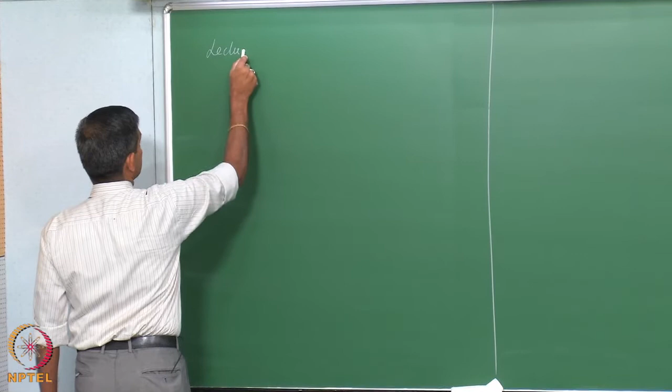Friends, let us talk about the QRA application problems in lecture 13, where we are going to talk about some application issues in quantitative risk assessments in module 3, where we are focusing on accident modeling, risk assessment and management.

We already said in the last lectures how one can handle different kinds of release scenarios like fire and explosion models. We have also said what will be the consequences in case of fire or explosion in terms of detonation, deflagration, etc. We have also said how overpressure and negative pressure can create damage on an existing system because of explosion. We also said how one can find equivalency of explosion damages using TNT equivalence. We are given equations to estimate them, and we also said what would be the over exposure risk limit in a given system for fire and explosion accident models.

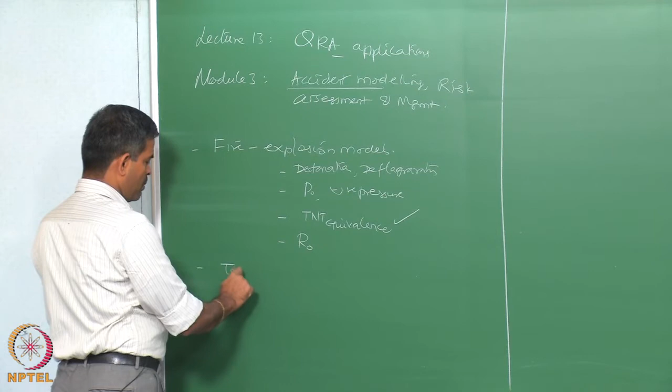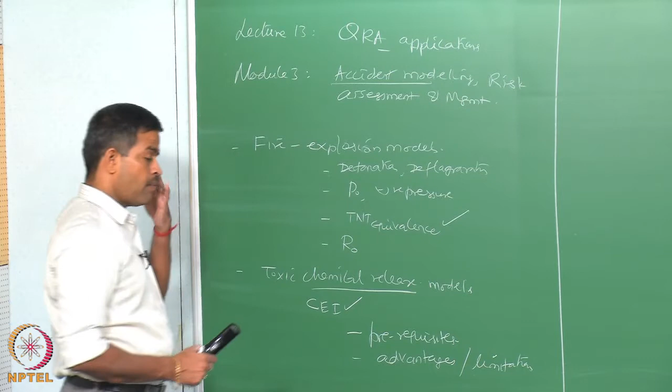Subsequently, we also discussed toxic chemical release models, where we said that chemical exposure index will be one interesting domain by which we can easily estimate the consequences indirectly. It has got certain prerequisites to do chemical exposure index. It also has certain advantages, and of course it has got certainly a few limitations, but globally the Dow CEI is acceptable as one of the powerful tools for estimating the damages which are envisaged because of probable or possible chemical releases in a given process system.

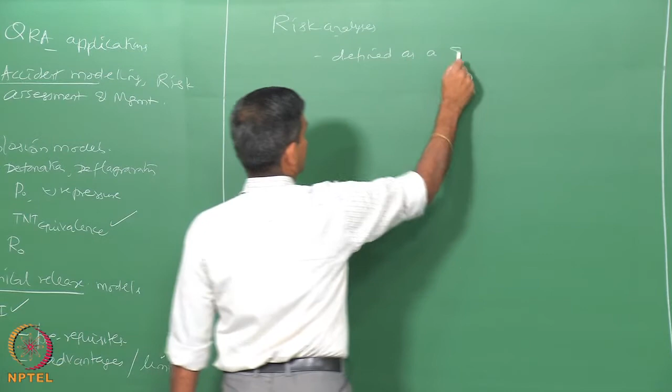Having said this, interestingly, there are many application issues when you talk about quantitative risk assessment. We already said risk analysis can be defined as a systematic identification. Let us get back to the original definition of risk analysis. It is defined as a systematic identification and description of risk.

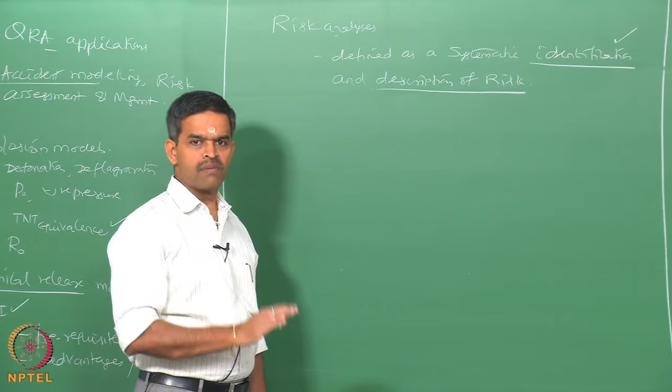It is very interesting. You have got to identify the presence of risk, you have got to describe what would be the risk. For example, identifying does not mean it will become a risk actually. You have got to describe the risk in terms of personnel, property, environment. So it is a very broad term of risk analysis. In property, one can also include equipments, one can say asset.

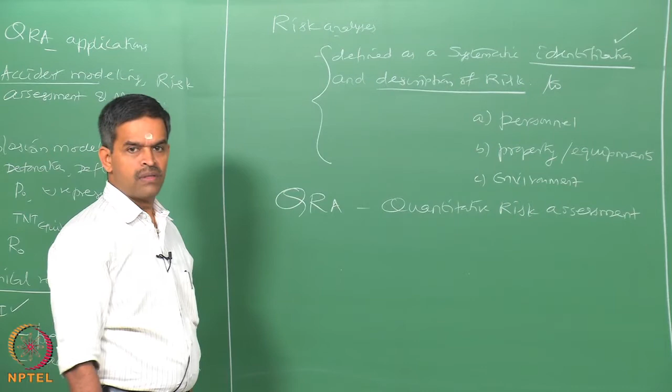Therefore, QRA, which is quantified risk assessment, quantitative risk assessment, therefore, need to be focused on the identification of applicable hazards, description of hazards, of personnel, environment and equipment.

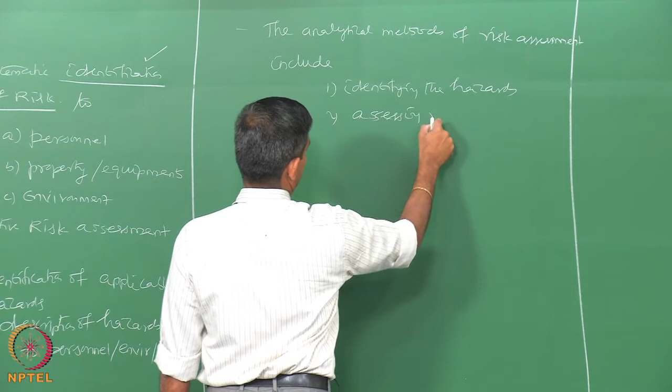Therefore, the analytical tools, analytical methods of risk assessment include identifying the presence of hazards and then assessing risk from the identified hazards.

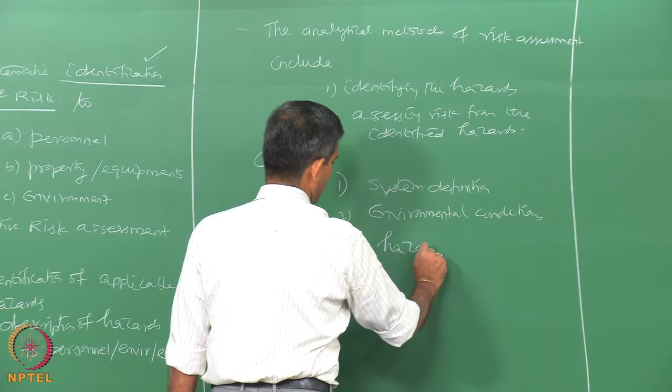So, if you look at the flow chart of risk assessment, the first step obviously should be the system definition, then identifying the environmental conditions, then identifying the possible hazards, then from the possible hazards realization of them in terms of assessing risk.

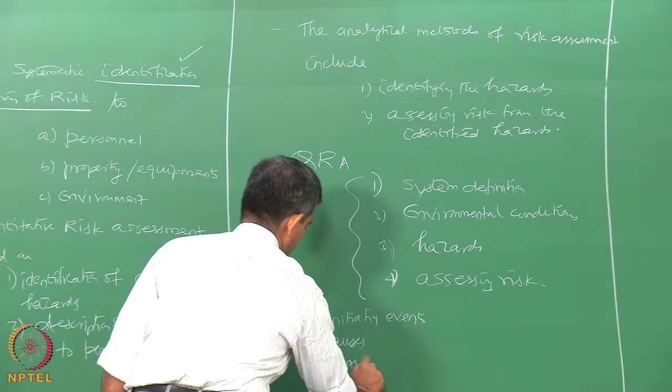While doing so, one need to identify the initiation or initiating events, causes and consequences. So these are important parameters, let us say gauge marks, in QRA.

As we now agree, in risk assessment the foremost step is to identify the hazard after you describe the system. After you describe the system, you identify the hazard first. So what we call as hazard identification, which we already seen in earlier lectures. Let us quickly revisit this again and understand. Okay? Hazard.

HAZID is useful in identifying the initiating events, it is done through a broad review of possible hazards present in the system, and also identifying the sources of accidents.

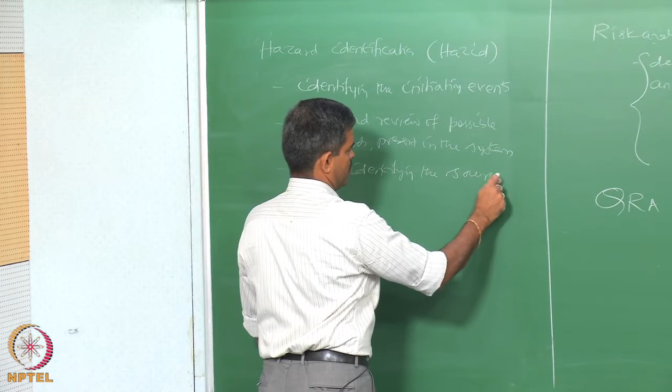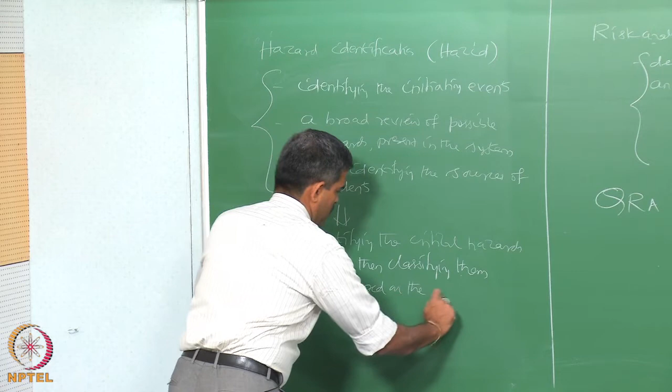So, most of the job of QRA is done at HAZID stage itself. Then in that case it will lead to identifying the critical hazards and then classifying them, based on the severity of consequences.

What is the advantage of classifying them? Once you classify them, you will know what should be the decision on level of analysis.

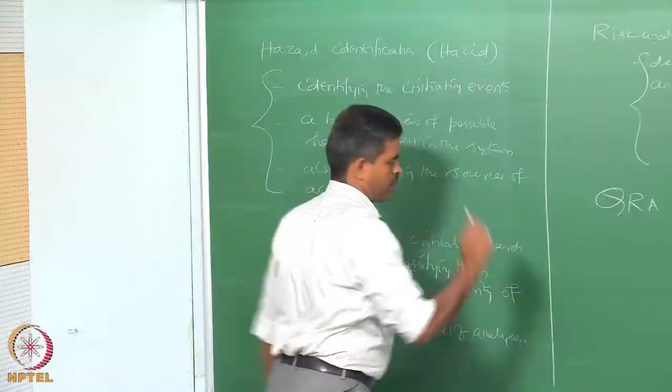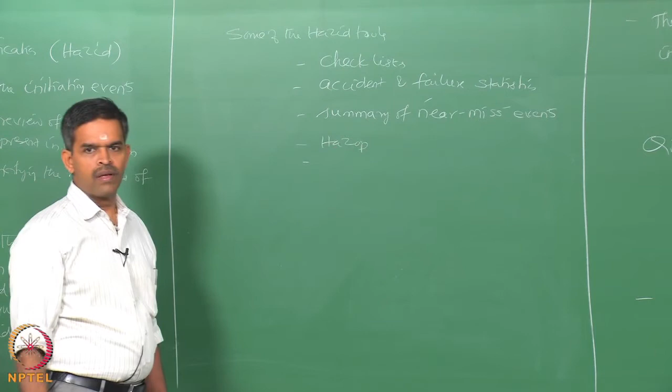Some of the hazard identification tools can be listed. Some of the HAZID tools could be checklist, accident and failure statistics, summary of near miss events, HAZOP, comparison of studies in terms of severity of consequences.

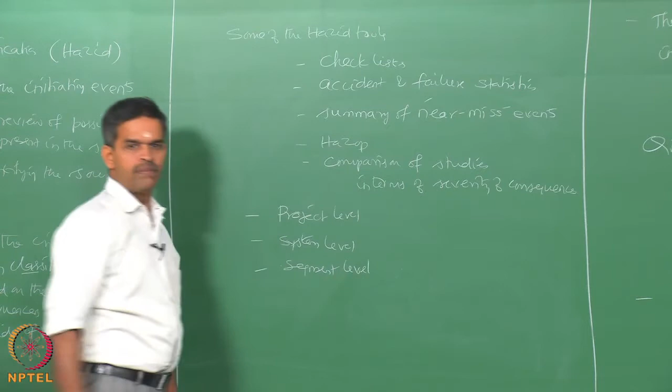Which can be then applied to project level, system level, segment level, equipment level. If you recollect, interestingly FMEA could be a useful tool in equipment level. If you recollect, interestingly HAZOP could be a useful tool. If you recollect, interestingly HAZID or what-if, etc., could be a useful tool. So, at different levels we keep on doing them, in fact even operation level, all, okay.

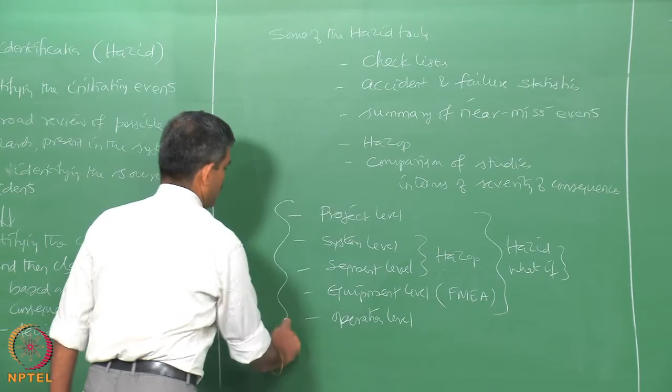As we agree and understand now, hazard identification is more or less leading to the summary of causes and consequences.

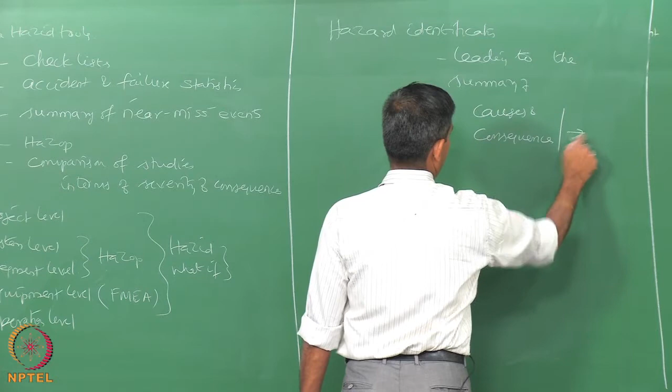To take it forward to QRA, instead of doing hazard analysis, one can also do cause consequence analysis. So let us talk about cause analysis. Cause analysis identifies the causes alone that may lead to initiating events.

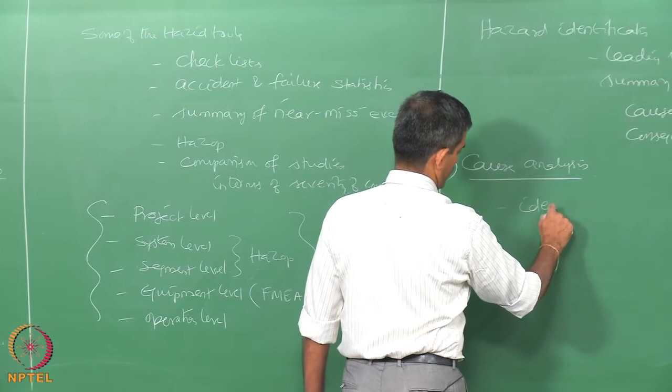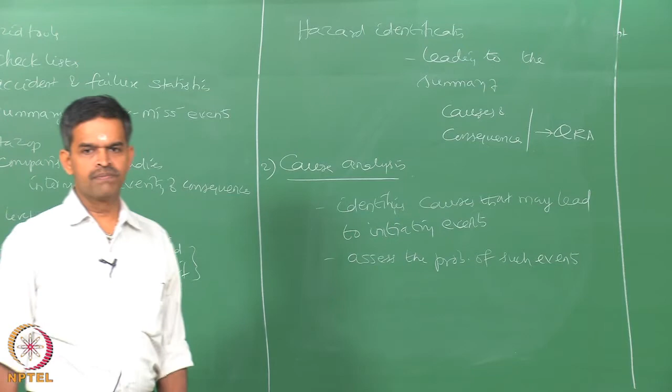It assesses the probability of such events, meaning the initiating events. We all agree that it is important to identify the cause of hazards or initiating events, because they will actually be the starting point of potential accident sequence.

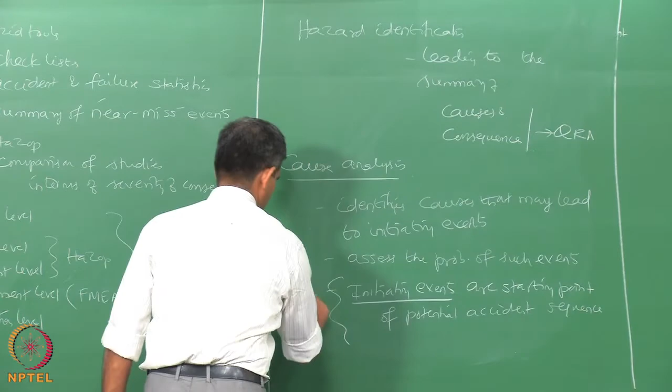So, initiating events are the starting point of potential accident sequence. I mean, it starts from there. It is a very, very important statement. So cause analysis helps us to actually identify these initiating events.

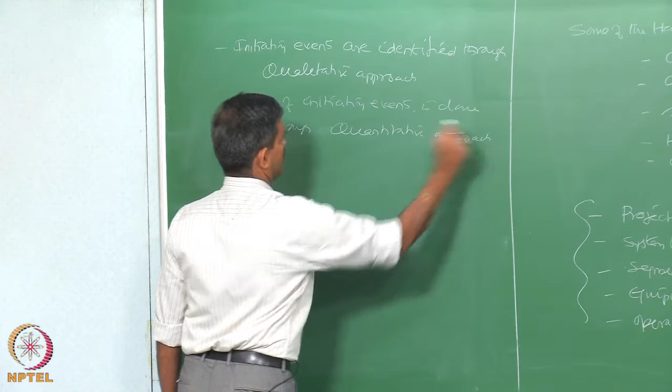Identifying the initiating events is done through a qualitative approach. Initiating events are identified through qualitative approach. If we really wanted to find the probability of initiating events, then this is done through quantitative approach. Identification is through qualitative, probability of occurrence of the initiating event is through quantitative approach.

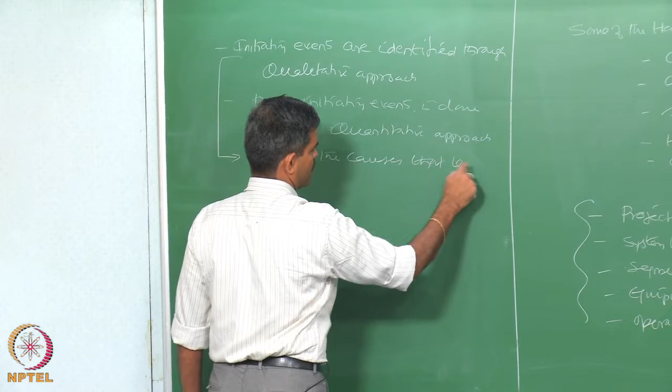The qualitative analysis identifies the causes that lead to initiating events, it also identifies the possible combinations that may result in occurrence of incident.

Some of the qualitative analysis could be examples which we already studied, but still examples could be HAZOP, preliminary hazard analysis, failure mode effect analysis, failure mode effect criticality analysis, human error analysis.

It is very interesting, which will try to tell us what could be the probable oversight which essentially come from near miss events or reporting of near miss events. You will be able to get human error analysis. One can also look at task analysis, one also look at error mode analysis.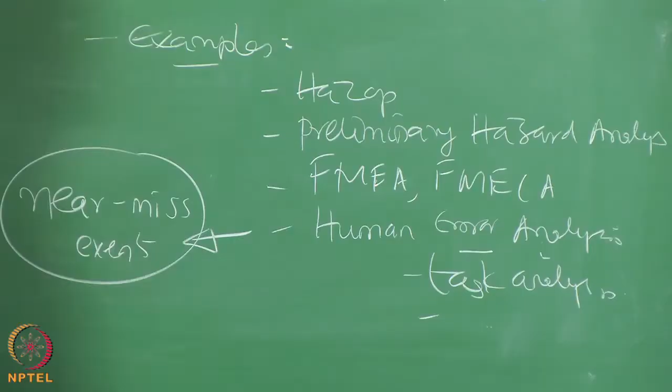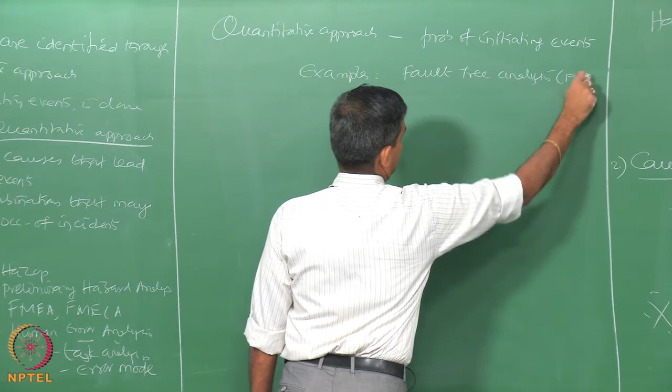If you look at alternatively the quantitative approach, which will lead to estimating probability of occurrence of initiating events, some of the examples could be fault tree analysis, event tree analysis, synthesis models, Monte Carlo simulation, and one can also use BORA methodology.

Interestingly, all are elaborately explained in Srinivasan Chandrasekaran, 2016, risk and reliability of offshore structures, which is CRC Press.

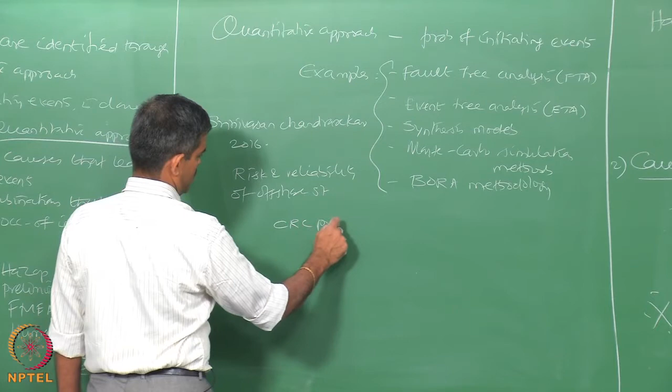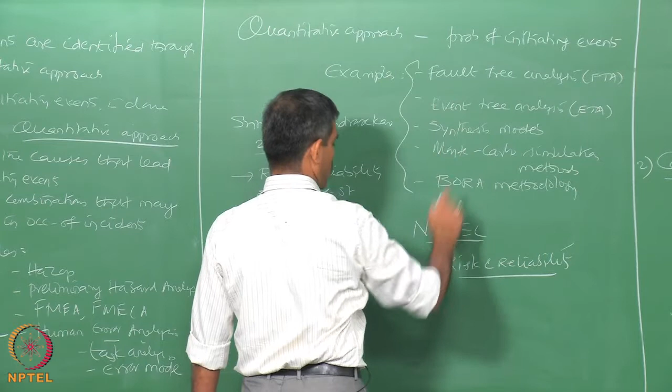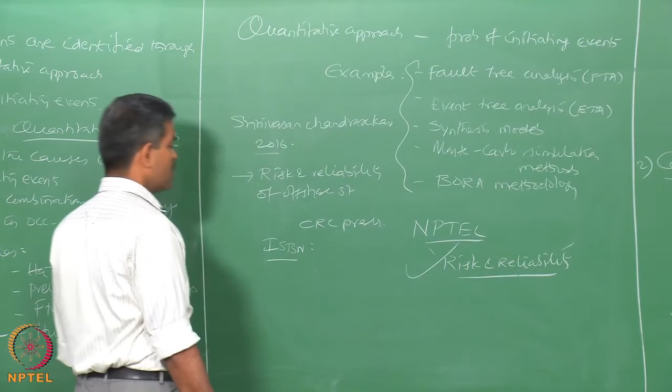The reference in terms of ISBN number is available in the reference section of NPTEL website of this course. Parallelly, we also have one more course on NPTEL which talks about risk and reliability. Please look into this course. Very brief examples and very interesting definitions of these kind of assessment are also explained in this course. So, for parallel understanding and additional reading, I would urge that you can go through these lecture notes from NPTEL,

which is again free, plus the reference to this textbook which has been authored by me. Now, let us talk about fault tree analysis, which is one of the quantitative risk assessment methods which are useful in identifying the probability of initiating events which can lead to incidents. Fault tree analysis links the final event with the basic event,

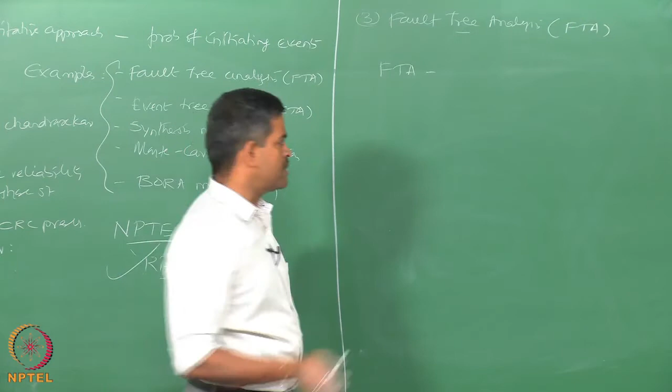It does it through a sequence of intermediate events. This uses deductive logic, which means that it progresses backwards starting from the final event.

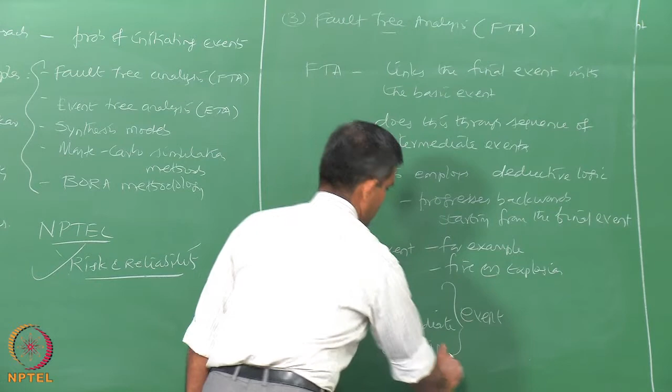Let us say for example, the final event may be for example, is fire or explosion. Then for that particular event, which is the final event, final, intermediate and initiating events are identified which are consequently interlinked through different gates.

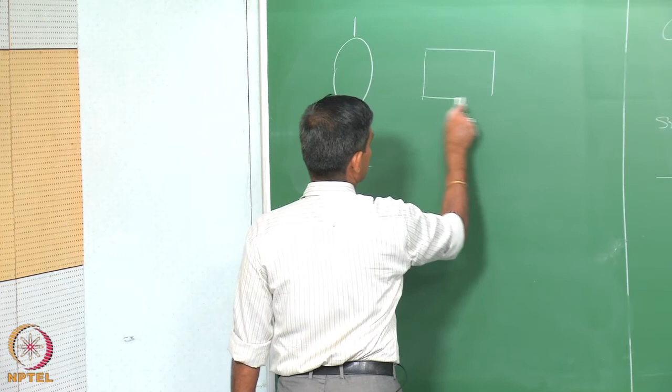Let us say the basic event is indicated in this manner, the intermediate event is indicated in this manner, and the undeveloped event is indicated in this manner. These events are generally connected through

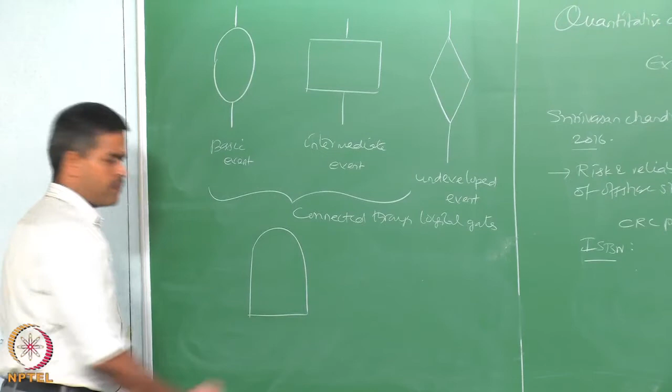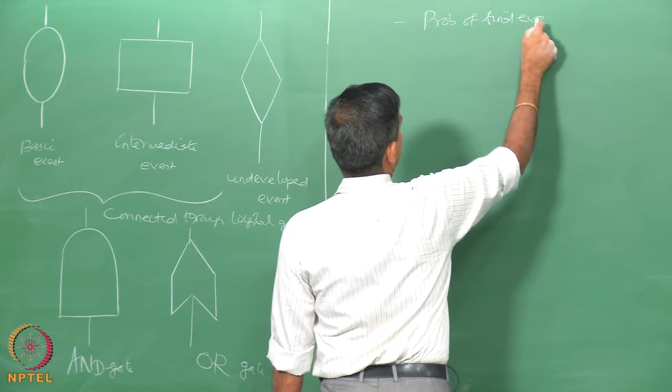logical gates. There are two kinds of gates. This is what we call as AND gate, this is what we call as OR gate. You can use both the gates in the logical analysis in building a fault tree to really connect these events. So, therefore, the probability of final event is calculated or is computed using AND gate and OR gates.

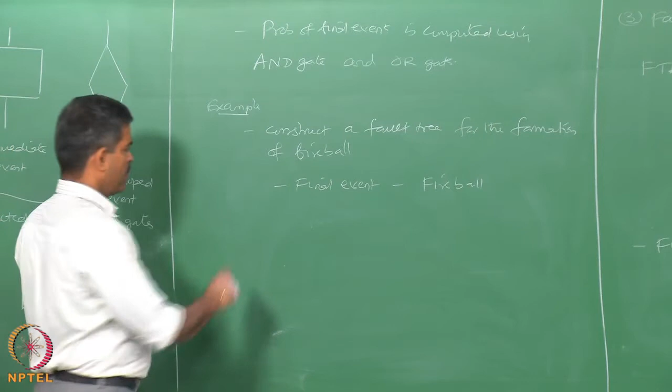Let us take an example quickly. We need to construct a fault tree for the formation of fireball. Let us say the final event which we identified is the fireball. When this can occur? When the chances of liquid petroleum gas is released from a pressurized vessel then this can occur.

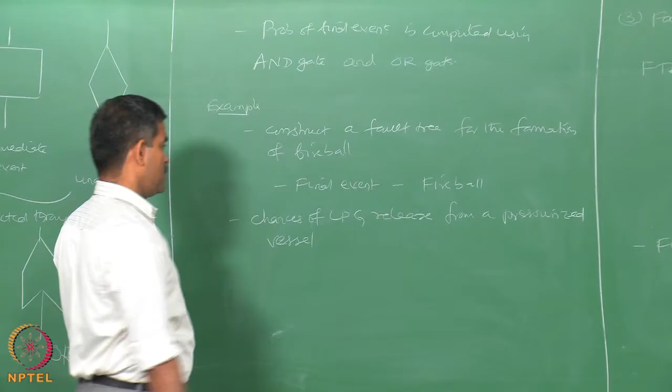The reasons are the chances or the reasons of release of this particular gas could be weld failure, can also be opening of relief valve by the operator, by mistake, etc. So, one can look into the detailed possible causes in a chemical manner of occurrence of fireball from the LPG gas release, looking at David and John

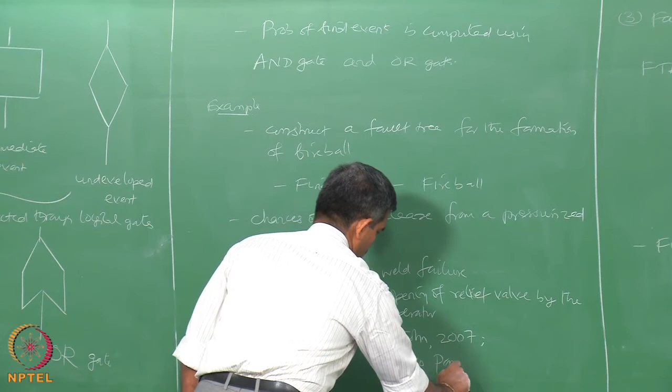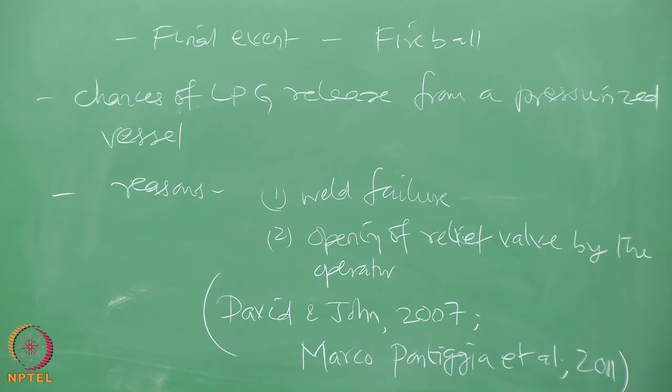2007, Marco Pontiggia et al. 2011, for more understanding of chemical phenomena of formation of fireball from that of LPG release from a contained pressurized vessel. Because of the chances or reasons of weld failure or opening of relief valve when the LPG gas released from a pressurized vessel, which could result in a fireball as a final event, the flammable mixture which is formed now

Let us say the final event is the fireball working backwards. We have different kinds of gates, as you see in green and blue color, different kinds of gates, AND gate and OR gate. So, the reasons could be to estimate the probability of failure of a fireball. We could have an LPG release and ignition source both present, then only one can have a fireball.

LPG release can occur either due to weld failure or due to relief valve failure. So, the probability of weld failure in a given system is, let us say, P1, and the probability of relief valve failure in a given system which can lead to LPG release could be P2. So, LPG release can have a possibility of P1 plus P2 as a failure probability.

Similarly, ignition source can be either from a cigarette or a smoking zone or from a friction spark, which can also occur from a mechanical abrasions of different systems or moving of cranes, objects, etc. So, the probability of each one of them is taken as P3 and P4. Ultimately, one is interested to know what is the probability of occurrence of fireball provided the LPG release probabilities and the ignition source probabilities of the system are known to me.

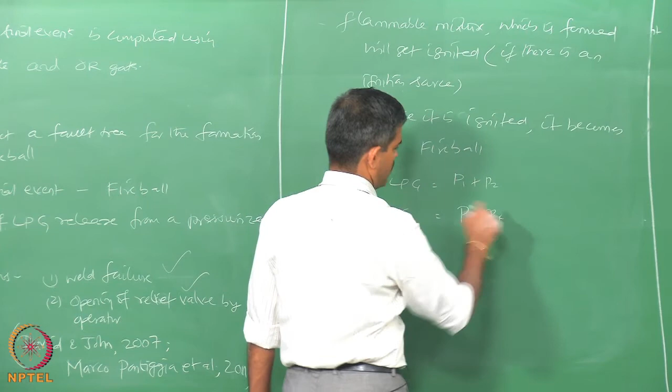Let us say probability of LPG release is P1 plus P2, probability of ignition is P3 plus P4, and one can say the probability of fireball occurrence is the probability of LPG release multiplied by the probability of ignition source. I can easily get the probability of fireball with a simple example demonstrated here.

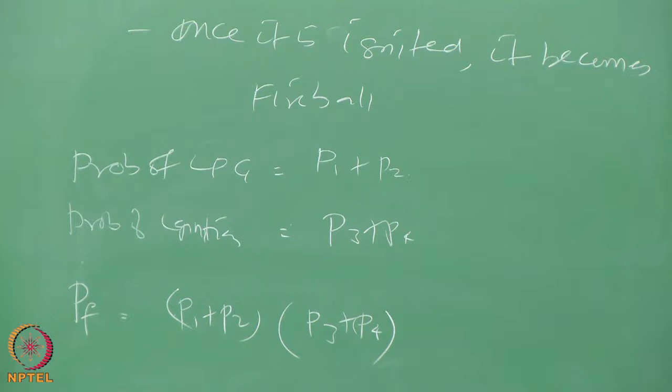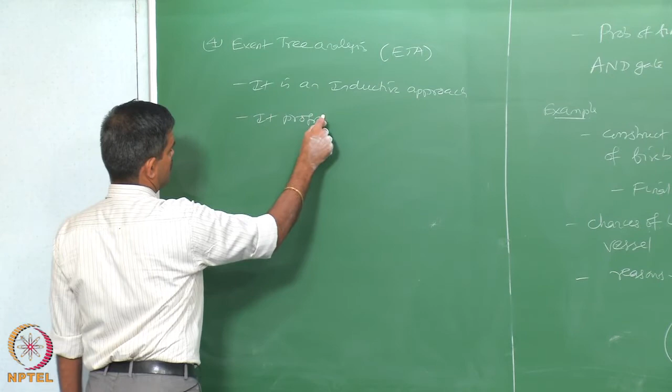The next study, which is also interesting, is event tree analysis. Event tree analysis is an inductive approach, whereas fault tree was a deductive approach. It progresses forward, whereas fault tree was progressing backward. It progresses through subsequent events leading to the consequences.

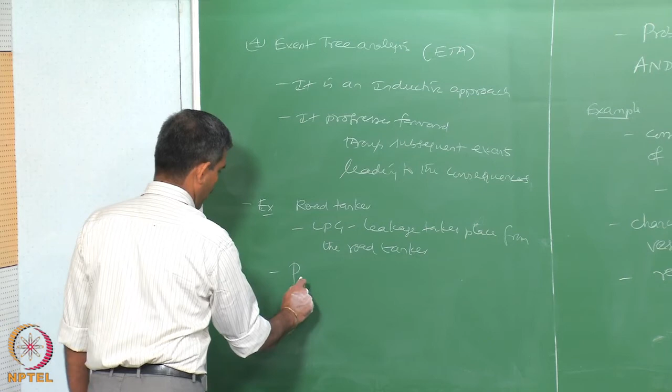One can also illustrate ETA through an example of a leakage of LPG from a road tanker. Let us say there is a road tanker, LPG gas leakage takes place from the road tanker. Let us say the probability of encountering an ignition source is 0.45, which is assumed based on inspection and experience.

A fire, if formed, could transmit to an explosion. Fire, if formed, could become an explosion. Let us say that the probability of becoming an explosion is only 0.2.

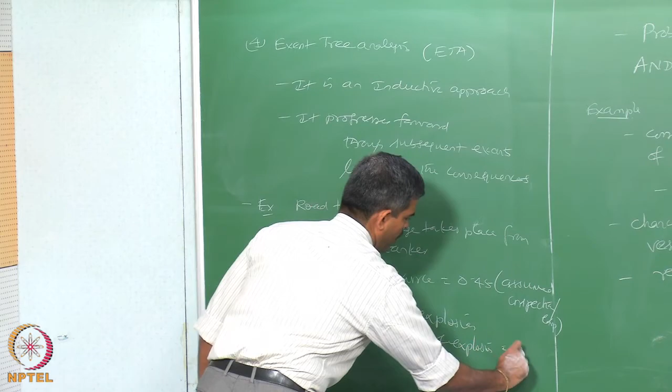Because explosion is 0.2 and without explosion is 0.8, one can lead to fire in case that explosion is for certain. One may not have fire, fire without explosion. So one can have fire with explosion, one can have fire without explosion. So one can easily find out the arrangement of events in different formats, lay them connected, and try to find out what is the probability of the end product, which is nothing but fire with explosion or fire without explosion.

The initiating event could be a road tanker leakage. It means this progresses forward from the event identified and takes it to identify the probability of failure of the consequence, whereas in the earlier case it started from the end event and progressed backwards. That is the difference.

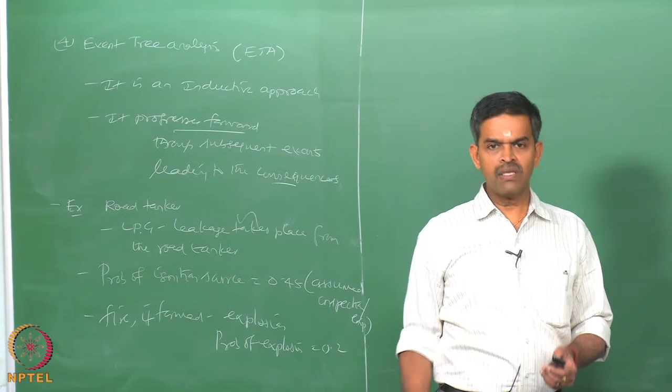When you look at QRA methods in general, there are many disadvantages. Let us see what are the disadvantages. Different approaches in QRA give different results, so it depends upon what to be trusted.

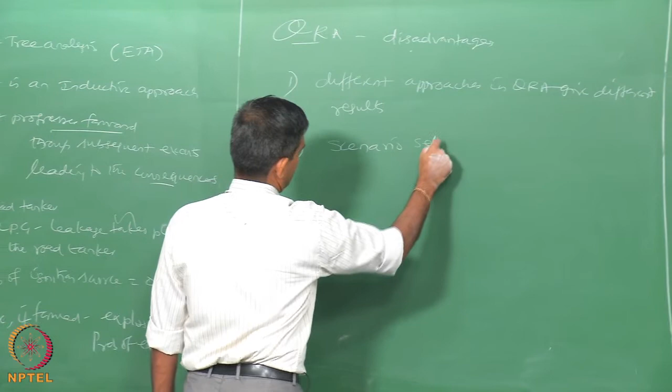Scenario selection is very important, as we just saw in the last lecture. Scenario selection is very important to have an accurate result, and it depends on the expertise of the risk assessor.

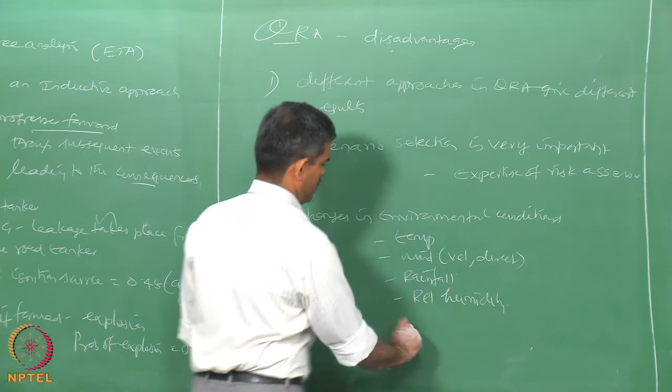Changes in environmental condition also play a very important role in risk assessment in QRA. For example, temperature, wind, both velocity and direction, rainfall, relative humidity, day or night, etc.

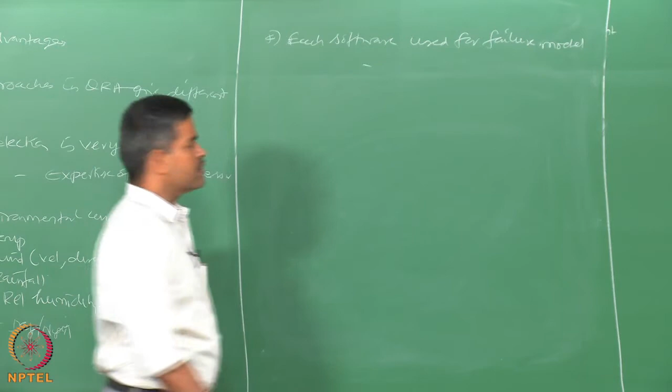Each software which is used for simulating the model, used for simulating failure models, may give different results for the same scenario. So it all depends upon how you handle the uncertainty in the software or in the failure models.

Interestingly, all countries do not have statutes specifying acceptable risk levels. So the database used for estimating the probability of failure of any specific event makes a very significant difference in the result.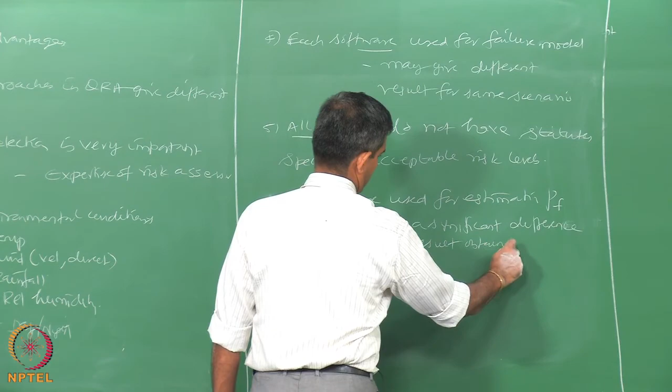As we said, when you talk about assessment, then you should say what is acceptance. So if you look at the risk acceptance criteria, which is very important to compare the calculated risk from QRA study of the plant with that of the acceptable limits, different countries follow different acceptable standards and criteria for process industries.

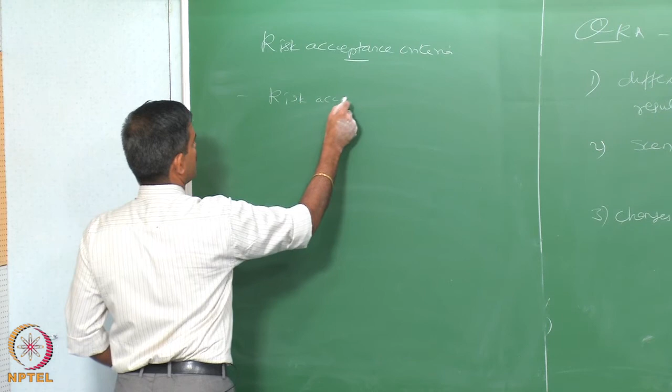One can see here the ALARP triangle as shown in the screen now, it contains three regions. The bottom one is the broadly acceptable region where the risk is highly negligible. The top one is the unacceptable region where the risk cannot be justified at all. The middle region is the ALARP or tolerable region, tolerable only if further risk reduction is impractical or the cost is not proportionate to the benefit gained.

So friends, it is very important to fix up these boundaries. These boundaries are nothing but the values you see on the screen here, which are given by

maximum tolerable risk and negligible risk. Let us see this particular content on the screen here. This is going to be my boundary for maximum tolerable risk, beyond which the risk becomes unacceptable. This is going to be a boundary below which the risk is negligible. These boundary lines are given by different standards of international agencies which are followed by different countries.

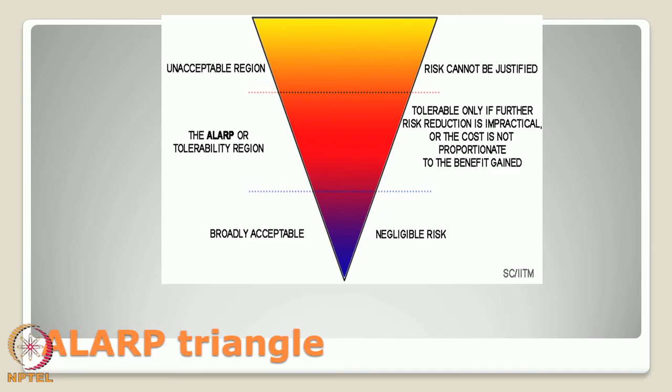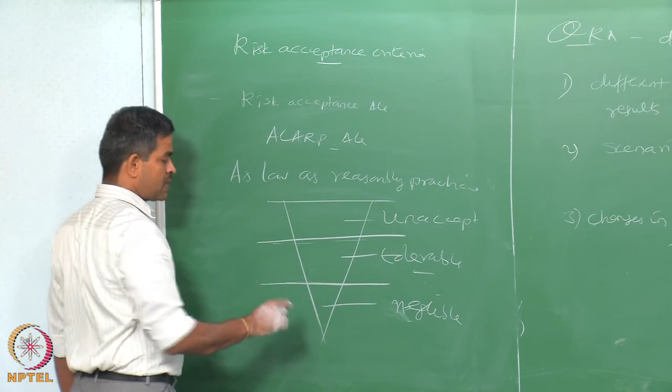So you have got three regions: this is acceptable, this is negligible, this is unacceptable, and this is tolerable. Let us put it as tolerable. So this boundary and this boundary, which fix my tolerable region or acceptable risk region, is what we call the ALARP region, defined by different countries through different international standards, as you saw in the table just now.

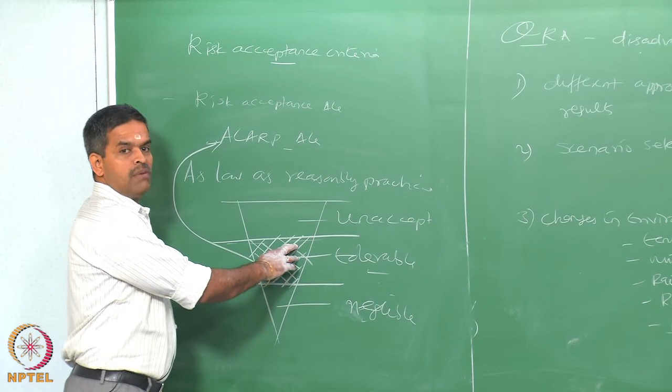Therefore, friends, the line which divides the risk into broadly acceptable and broadly tolerable or broadly unacceptable varies across different standards and practices in different countries. Therefore, one cannot really quantify risk in the sense of whether it is really acceptable or tolerable, depending on what kind of practice you are following.

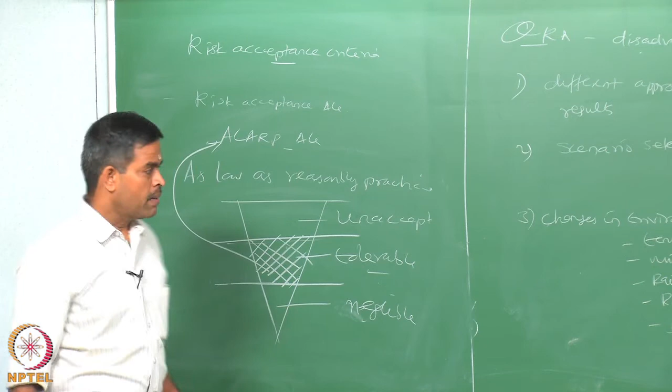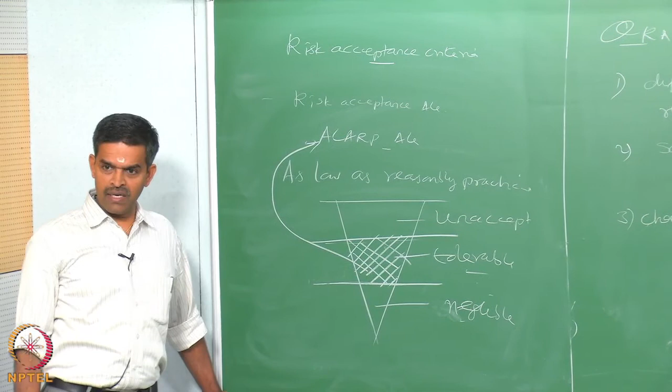And interestingly, many countries do not even have standards to be followed. Therefore, they follow or adopt international standards of other countries. Therefore, there is again a big anomaly in fixing these borders of acceptable or tolerable region of risk. Of course, let us agree and understand, for an offshore industry, the statutes of international regulations prefix these values. One cannot keep changing these limits as and when the industry is being formulated. These standards are prefixed.

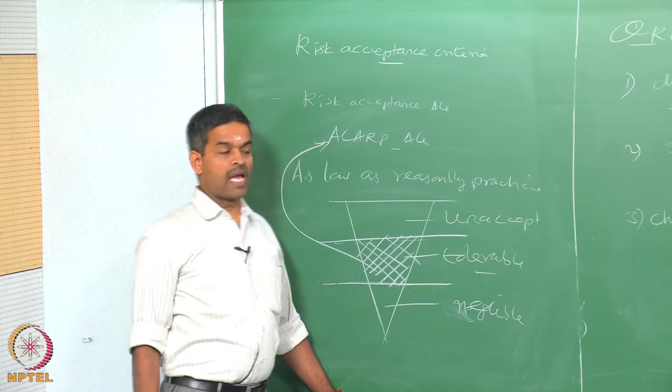However, on what basis are they prefixed? Can they be altered? Can they be revisited? It all depends upon the country's statutes or what practices they follow in their respective countries.

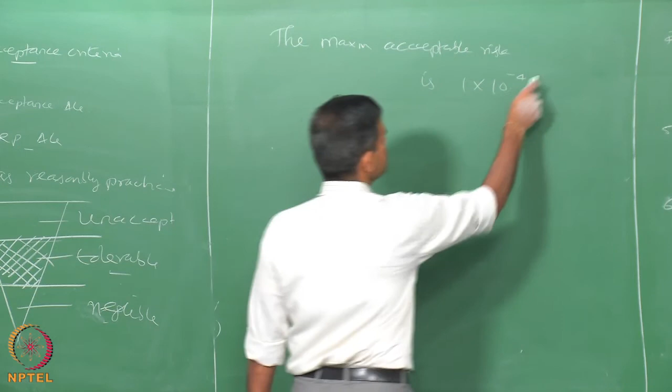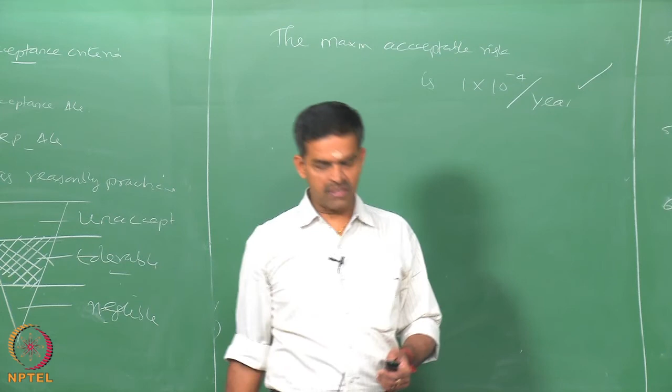The maximum acceptable risk in offshore process industry downstream sector is 1 into 10 power minus 4 per year. That is the maximum limit. Above this value, risk becomes unacceptable. Therefore, in between is the ALARP region, which shows that risk is tolerable only if further risk reduction becomes either impractical or the cost involved in risk reduction is not proportionate to the benefit gained because of risk reduction. That is the ALARP triangle.

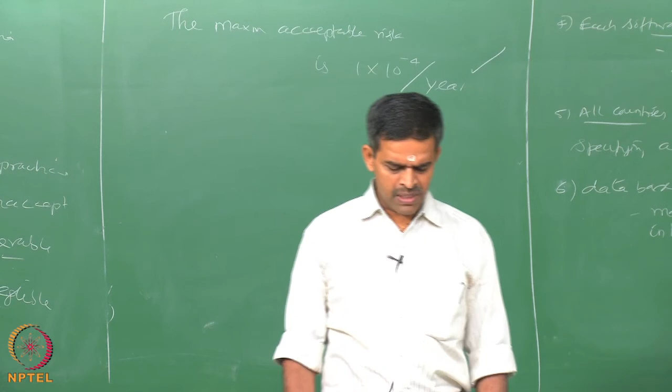So friends, in this lecture we understood the application issues of QRA. We have also understood what important data are required to do qualitative and quantitative risk assessment methods. We have seen some examples. We have also understood how to construct a fault tree and event tree in simple form for identifying a specific fault or a specific probability of failure in a given system. And we have also seen in the summary at the end what issues actually make risk manageable or acceptable, provided you estimate risk using QRA techniques.

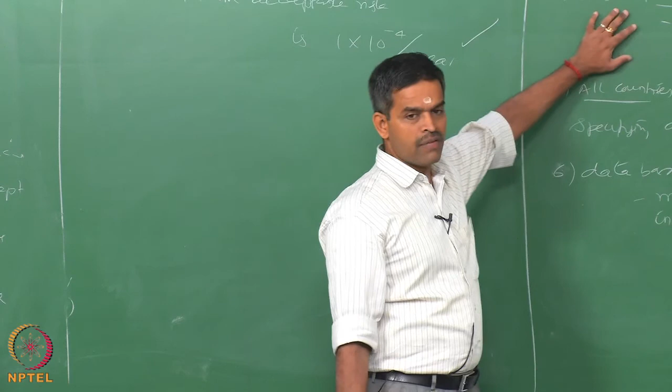However, whatever estimate you make from QRA techniques has certain uncertainties and difficulties in terms of the methods employed and the country or practices you follow. The acceptability of risk deduced from the models depends on the statutes you adopt or the practices you follow in your country. So it is very interesting that we do not have a single global standard of risk acceptance applicable to all countries and all process industries, because it all depends on the economic index of a specific country, the style of manufacturing, the product cost, taxes, public interest, etc.

Therefore, there is a very large scope to understand risk definition in terms of global standards, but certainly we have to agree that standards have been formulated and industries are following them stringently, so that we are all the time aiming to manage and reduce risk. And we have to agree on a final statement: offshore industry, in terms of process industry, is not a zero risk industry. Because of the high degree of uncertainties involved in the whole process, you cannot actually make risk practically zero. You design them to become zero, but because of environmental conditions and operational variations, risk will be envisaged and risk will be present.

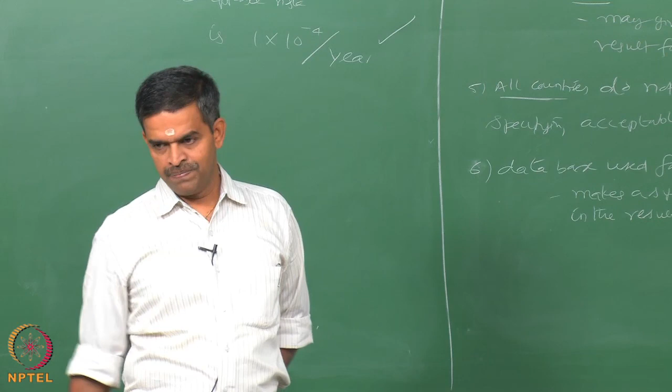So what we have to look at is whether the risk available, projected, or identified is within acceptable limits or not. If not, we should manage the risk so as to bring it to an acceptable level. If it is already at an acceptable level, let us try to maintain that level so it does not go to unacceptable standards. Thank you very much.